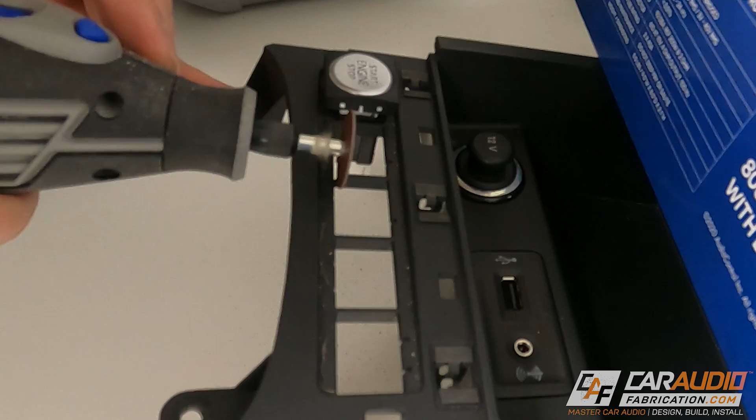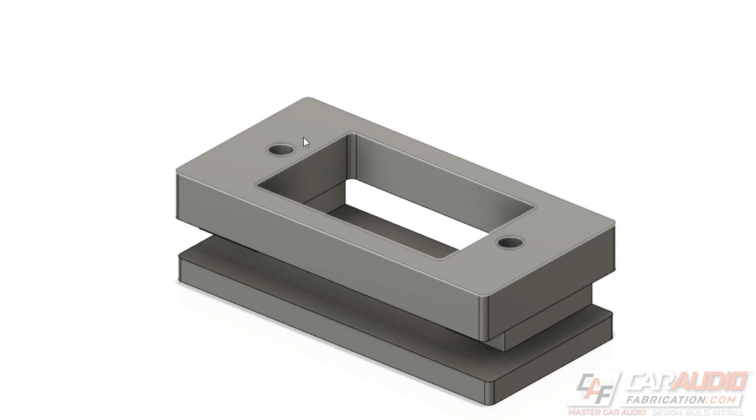The top plate has the 2 cutouts for both of the screws, as well as this cutout for the knob itself and the little alignment pin. If we hide that, the next piece below it gives me some thickness of material so that I can have a tapped thread in here, because I'm going to bolt the assembly from the back side using a threaded fastener.

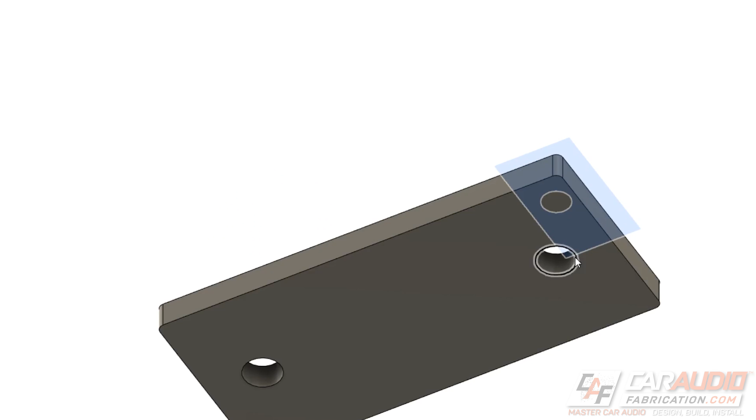You may notice these holes are covered by the top piece because we don't want to see those bolts. The next pieces down just serve to align the whole assembly within that little area on the pocket. If I hide those, the final piece just gives me the gripping strength. These are just through holes that the bolt will go through into the tapped holes in order to hold everything in from the back side.

I cut this first little test piece out of 1/8 inch acrylic just to check all the spacing of the holes. Everything lines up good. So once we get this in, it'll sit at about this level and look a little something like this. Let's start getting all these pieces cut.

So I'm test fitting my pieces and everything looks good, except for, you guys may have caught it in my design, this back plate. It definitely needs to have a hole in it so that there's clearance for that circuit board to push through it. No big deal, I'm just going to modify the design real quick and add a hole on the inside of that back plate. There we go, that's more like it. So all my test fitting here looks good.

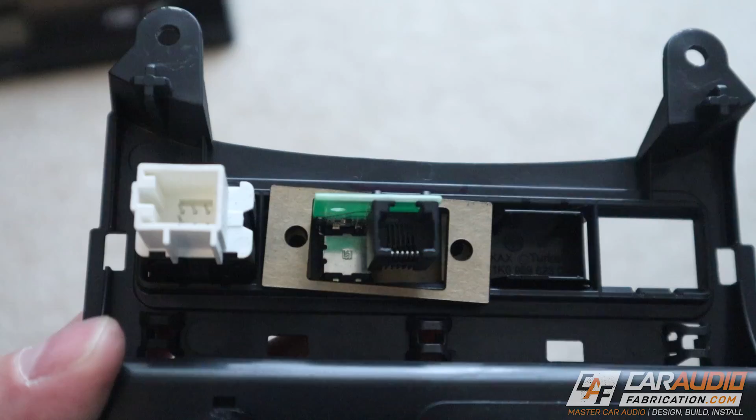Now I just need to glue everything together. To glue the little pieces of the assembly together, I carefully align them, and I'm using an acrylic cement. Here's what the assembly so far looks like. You can see I have that spacer piece in order to give this some thickness, as well as those tab pieces that position this inside.

And I have to say, this is really satisfying how perfect it fits in there. It can't twist because of those little tabs. Oh man, let's get this put together.

And here it is, my friends. Check it on out. We've got the ACR-3 remote dash control fully mounted in our factory panel. Now, once I got the panel installed back into the vehicle, it looked like this, and I am super happy with how this turned out. It looks sleek, and I think it fits perfectly.

Now, I want to hear from you guys. Have you ever made a custom mount for a bass knob before, or do you usually just kind of hide it under the dash or stick it in a center console somewhere where it won't be seen? Basically, I want to hear from you guys and know, how have you installed these before?

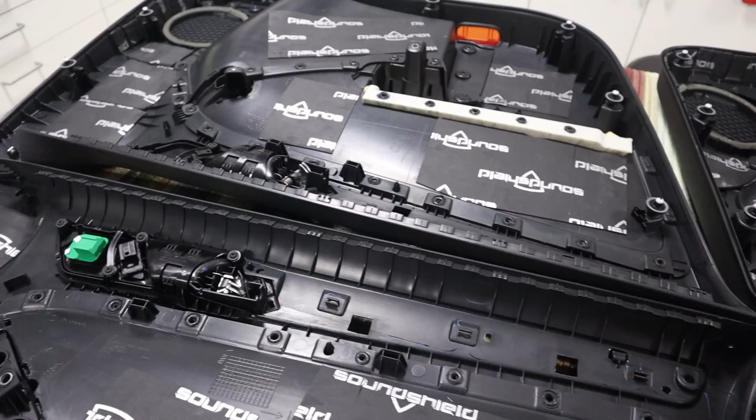Coming up, we have got some sound treatment to do. And unfortunately, this car only allows 6-inch speakers up front. So how can we accommodate some 6.5s? We're gonna make some custom rings.